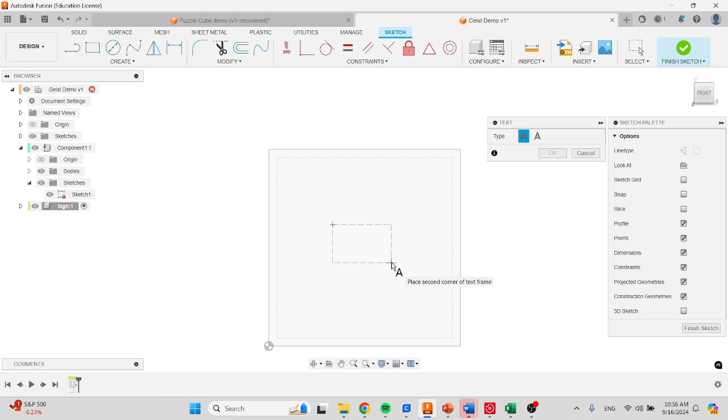And I'm going to keep things relatively simple. So to do that, I can basically just create some simple text. I'm going to just place it anywhere to start by clicking one corner and dragging it to the next. And I'm just going to type in the numbers 1, 6, which clearly are really small. But if I highlight them and I bold them, I can now start to play with how big they are. I can also change my font, however you want to say it.

But notice I want the numbers to stick together, because if I were to cut out the 1 and the 6, they would fall apart from one another. There wouldn't be anything connecting them. I also can get bigger than this because look at the space I have. So I'm going to change that number from 6 to maybe 10 and see what happens. Probably kind of big.

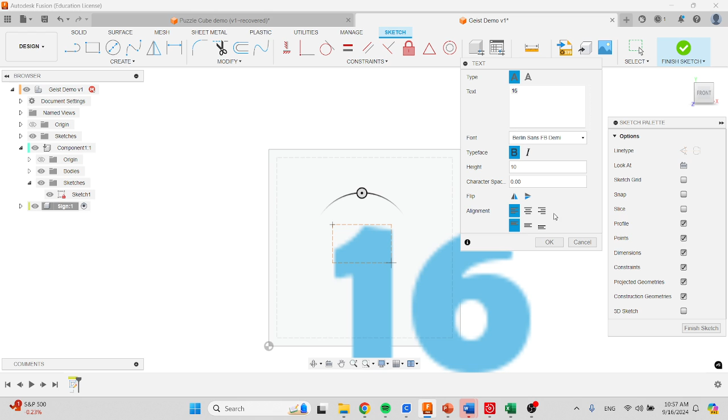Now, there's also some ways that I can squeeze my text. So now I have character spacing. So if I put in 50, you'll notice that I stretched it wide. But if I put in 0.5, I can start to squeeze them together. 0.2. Let's go 0.2 now. 10. There's got to be a way to squeeze these together. How did I do that once before?

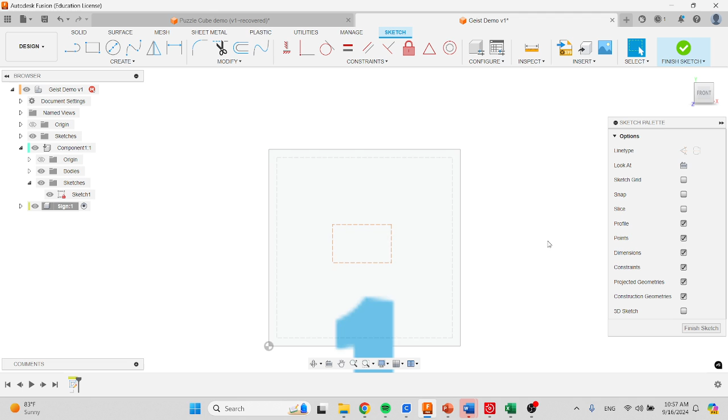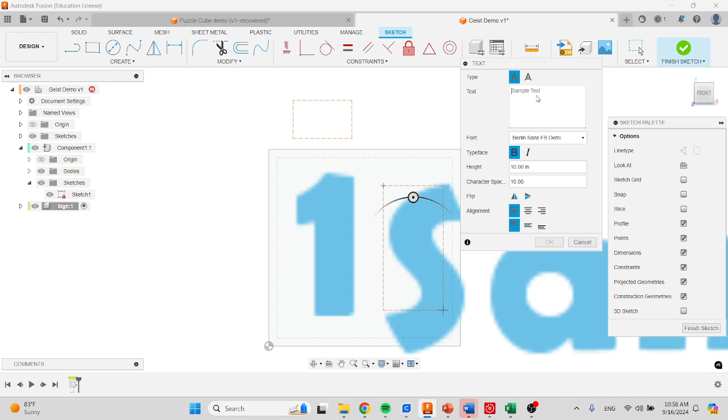Well, here's what I'm going to do. I'm just going to do a 1. And I'm going to say, okay. I'm going to bring that 1 right here. And then I'm going to make another one. Haha. Create text. This is called figuring it out as I go. And I'm going to do a 6. Create text. And I'm going to draw a 6. I'm going to put that right next to it. So now you can kind of see my 1 is in there and my 6 is in there. And I'm going to get them to kind of intersect one another.

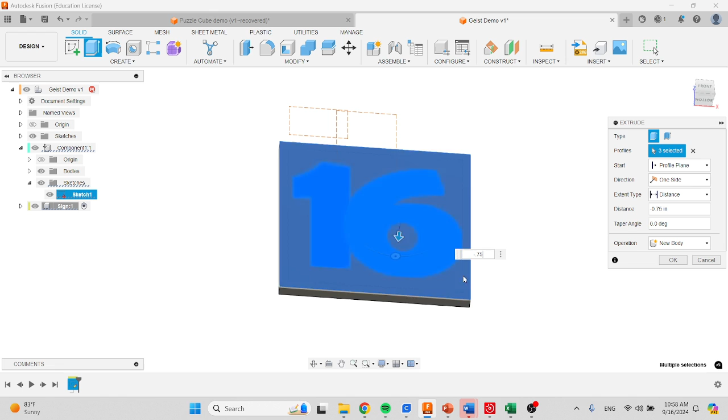Just like that. I'm going to finish my sketch and I'm going to click extrude, and I'm only going to pick those two. And I'm going to go negative 0.75. Now notice how it also picked the square behind it. So if that's the case, you can turn off, by clicking the little eyeball, the component behind it. That way all I'm doing, oops, that did not pick like I wanted it to pick. Cancel. I'm going to highlight them first, and then I'm going to pick extrude.

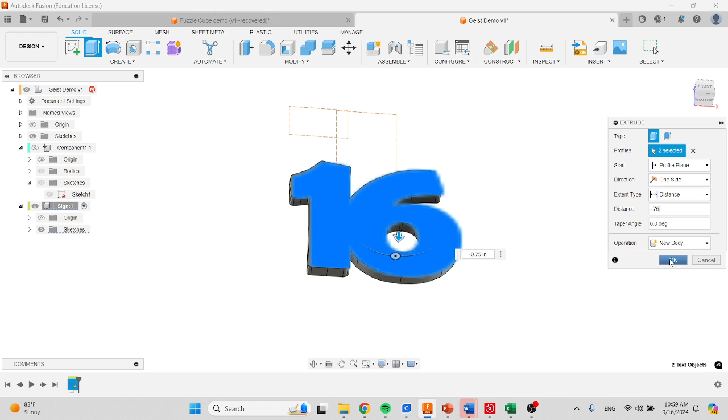Oh, so if you pick them first and then pick extrude, now I can go negative 0.75. I'm glad I'm running into these issues in front of you. So I'm trying different potential solutions. All right, now I'm going to hit OK, and now I have my 16, just like that. If I turn on my component behind it, you can see how it'll fit, and it'll cut out the perimeter and cut out the inside and all that good stuff.

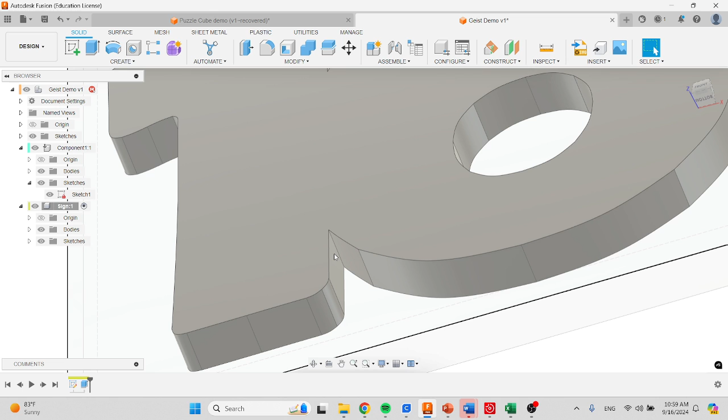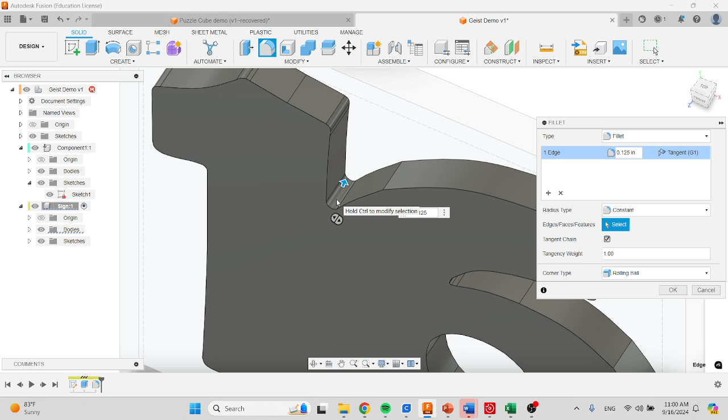Now, I do want you to make sure that all the inside corners are filleted to accommodate a tool that is 1/4 of an inch. So what I'm going to do is click on fillet, and I'm going to click all these inside radiuses, and I'm going to make sure that it is 1/2 of a quarter, which is 0.125. There's another one up here. Fillet, 0.125. All right, it's looking good.

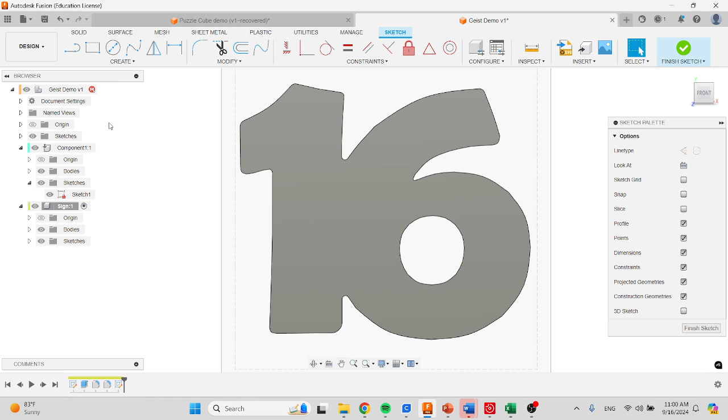Now, if I wanted to be a little bit more pizzazzy with this 16, just to make it look a little bit cooler, I could maybe pocket out the front just to give it a little bit more three-dimensional look. So I'm going to make a sketch on the face. And if I go up to create and I go to project, I could project the perimeter. And then I could click O for offset. And I could drag this in, give it a little bit of a border. I could type in my distance, maybe it's 0.35 or something that looks decent.

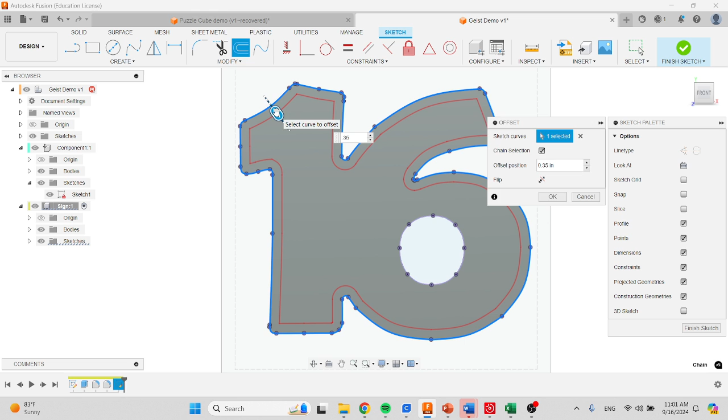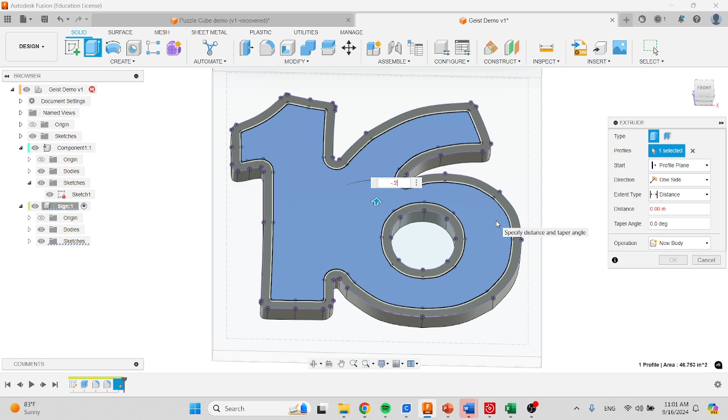I could also offset that in 0.35. And then I have two edges that are 0.35 off of the edge. And then if I wanted to, I could just pocket that down, maybe -0.2, just to take away a little bit. Number 16. But now that I look at that, I feel like there should be a strip that comes down in here. So I'm going to undo, and I am going to maybe create the 6 in here, and I'm going to pocket out the inside.

I got some visitors in here. So what do we need, visitors? A what? Key set, an Allen key set. Oh, an Allen key set. Yeah. There you go. Thank you. So Tony just borrowed an Allen key set. Thank you, Tony. Hopefully go and get what you need done.

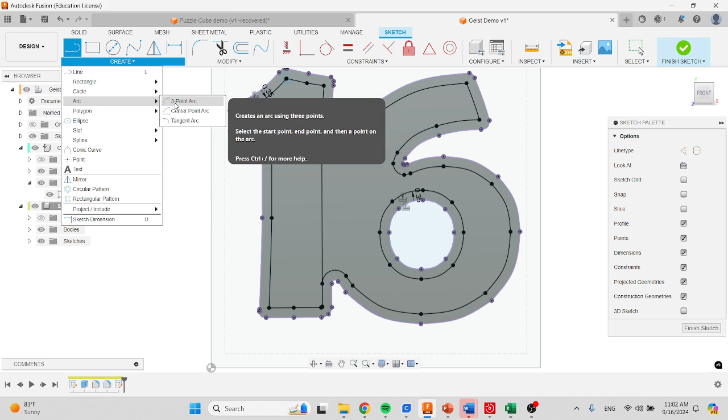You're welcome. So you can do modifications from here, like add geometry, like maybe I'll bring that down. If I wanted to maybe make an arc. This becomes a little artsy. I'm just gonna make a little arc in there. Oh, that actually looks pretty good. And now I can go in and I can extrude just that and just that. -0.2. There we go. That looks better.

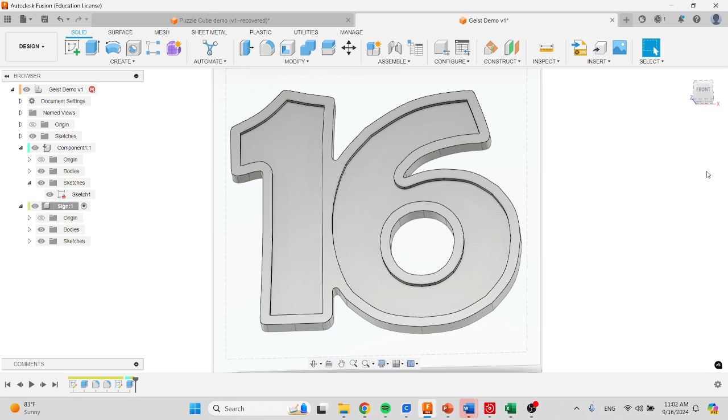And again, this is just for demonstration purposes. You're just making a sign. You're kind of cleaning out some pockets to give it some three-dimensional appearance. And then you're going to click Save. And then, once you're happy with it, call me over so I can check it, and we can get it ready and set up for manufacture. So that's all for the sign making. All right. Thank you.